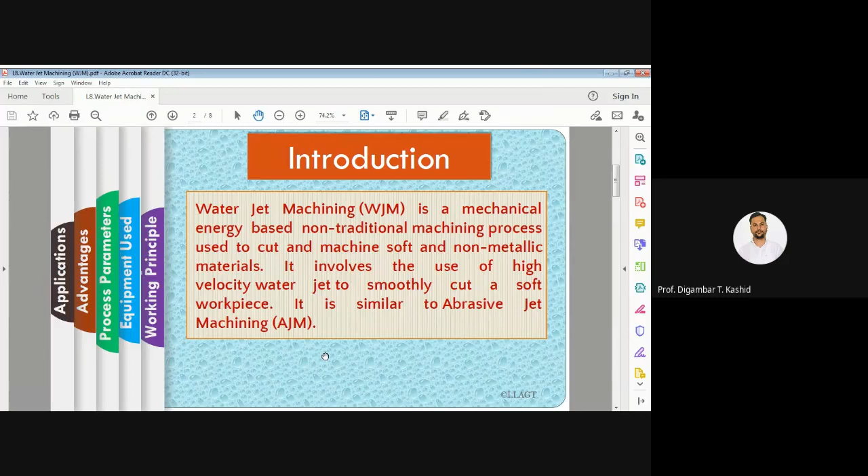In short, in water jet machining, high velocity water jet, up to 900 meter per second, is allowed to strike a given workpiece, and during this process its kinetic energy is converted to pressure energy, which induces a stress on the workpiece surface. When this induced stress is high enough, unwanted particles of the workpiece will remove automatically.

Whatever removal of material in this process is there, that removal is caused by the water jet only. So water jet is the cutting tool for this process, or in this water jet machine. Remember, the water jet acts as a cutting tool which removes the workpiece particles, and it will never become dull since the cutting action is performed by the water jet only.

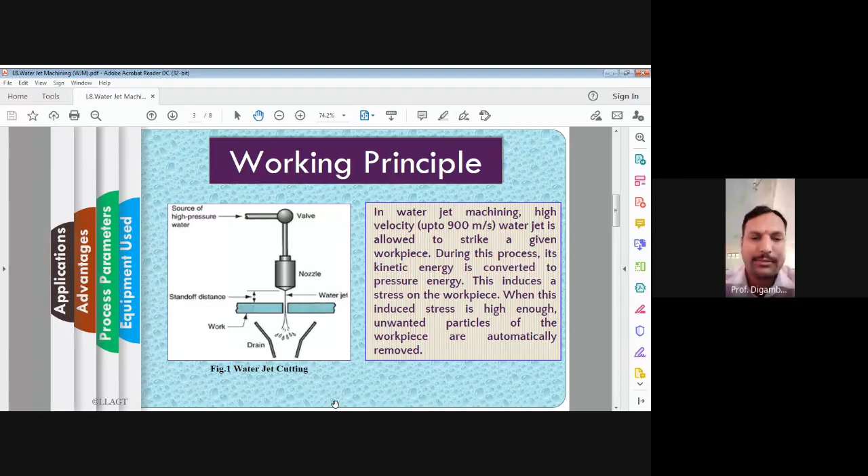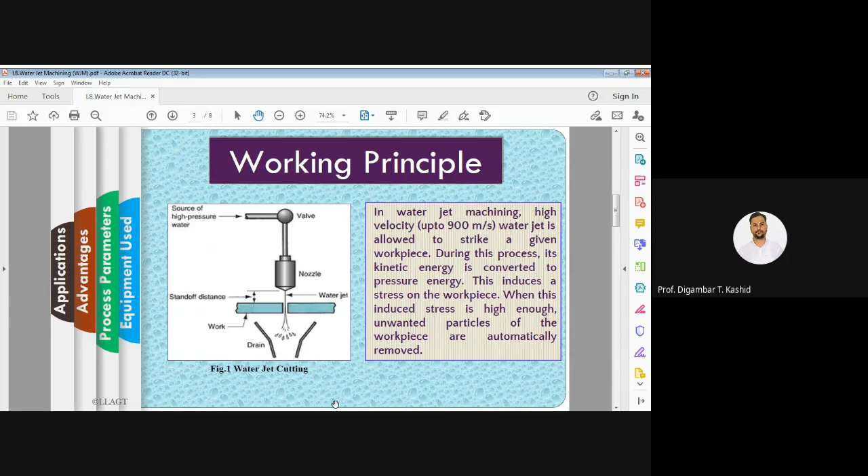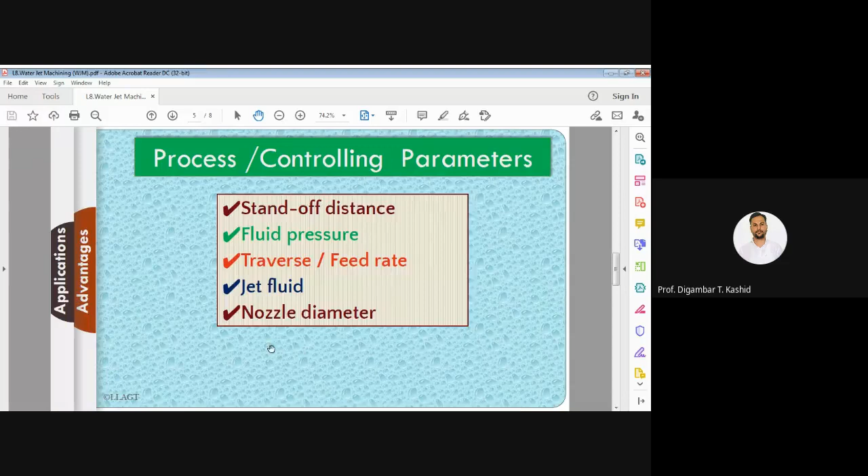Now let us discuss the advantages of water jet machining. The basic or general advantage I have given first: it is a fast process. Then it prevents the formation of heat affected zones on your workpiece, because here we are using water as the cutting tool. So there is no issue of the heat affected zone. It prevents the formation of the heat affected zone on your workpiece.

Again, as we are using water with high velocity, it automatically cleans the surface of your workpiece also. Again, it has excellent precision. What is the tolerance? Tolerances up to 0.005 mm can be obtained using this water jet machining process. And this process does not produce any hazardous gas.

Okay, again this process is very eco-friendly. So these are the advantages. Now, disadvantages also I have given. So here only soft materials can be machined. Okay, because if you want to cut the hard material using this water jet machine, then it takes more time.

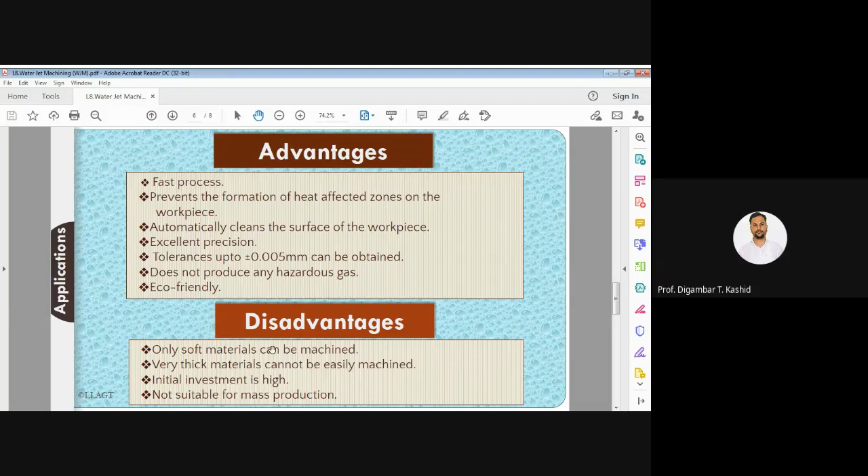Okay, again the initial investment is also very high. Okay, again for mass production purposes this process is not suitable. Okay, so these are the disadvantages. Now the last part is applications of this water jet machining. So here I have mentioned some applications.

So this process is useful for cutting materials which are porous, fibrous, then granular or soft also. Okay. Now, in some books they have not stated the fibrous materials. These applications I have taken from one of the textbooks. Okay. So this process is useful for cutting materials which are porous, then granular or soft. Okay, again it includes materials like corrugated boards, then rubber, granite, then plywood, glass, aluminum also.

Okay, again this process can be used to cut wood, ceramic, composites, leather, foam, wire stripping, and deburring purposes also. Okay, again in aerospace and other similar industries, cutting of asbestos is done by using this water jet, because there we need to minimize the airborne dust in the atmosphere. So if you use the water jet, then there is no issue of that airborne dust. Okay,

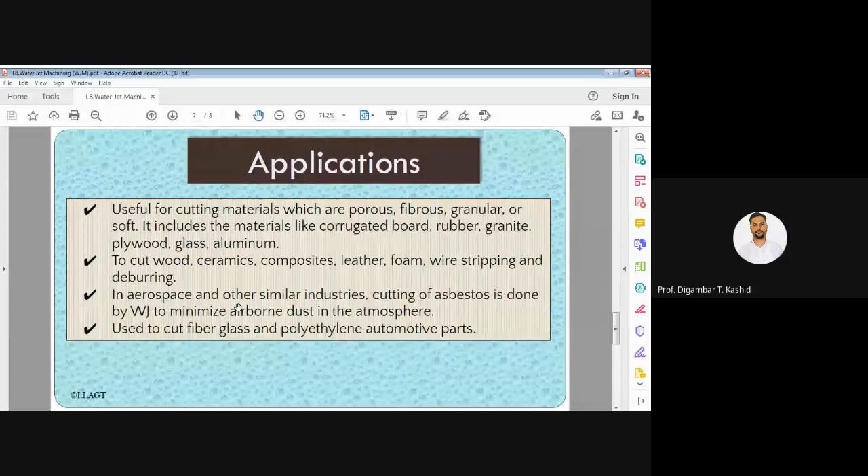Okay, we are not reusing the water. Okay, because if we take fresh water, there is no issue. But to reuse the water we need water treatment and other things. Okay, so it is better to take fresh water. Now one thing I forgot to mention here: in this diagram you can see when the water jet comes out of the nozzle, it travels at a very high speed, usually more than sound velocity, that is up to 900 meters per second.

And to minimize the exposed length of your jet, from a safety point of view, and to minimize the process noise, here a drainage, also called a catcher, is used, a slot type or tube type catcher. Normally that catcher is attached to your drainage hose. And what is the purpose of this catcher? The catcher uses a hard and replaceable insert to break the jet quickly and completely, before it reaches the bottom of your tube. So slot type or tube type catcher is used. So a catcher is required in this water jet machine also.

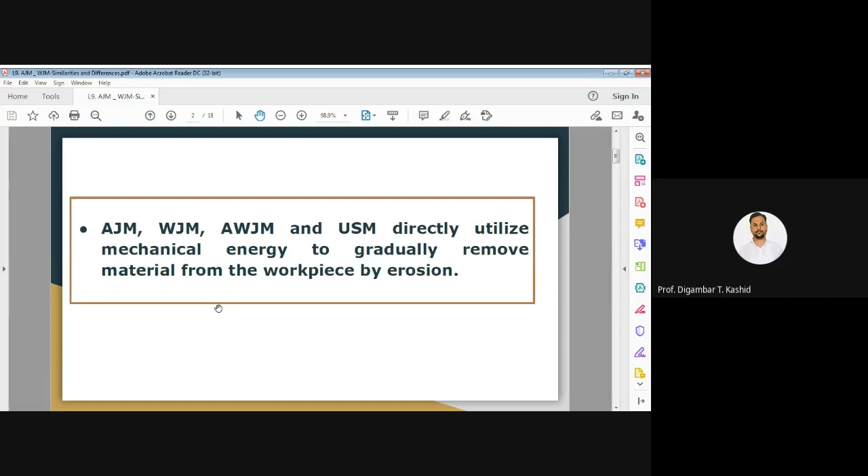Now in this slide I have shown the similarities and the differences between abrasive jet machining and water jet machining. As we know, both abrasive jet machining and water jet machining directly utilize mechanical energy. It may be in the form of kinetic energy or pressure energy, and that energy is utilized to remove the metal from your workpiece by erosion action.

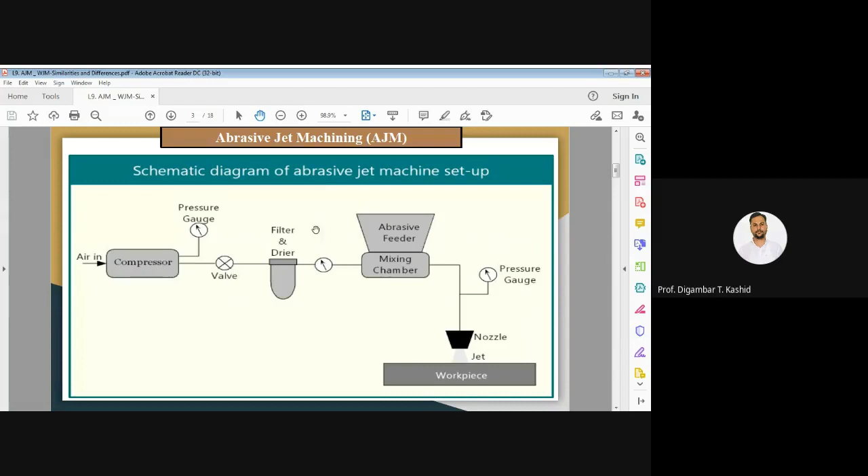We have studied the working principle of abrasive jet machining, and just now we have seen water jet machining also. Now let us discuss the similarities first. Both are non-traditional, non-conventional machining processes, none of them is considered a hybrid process, and both are mechanical energy based non-traditional machining processes because they directly utilize kinetic energy to remove the material.

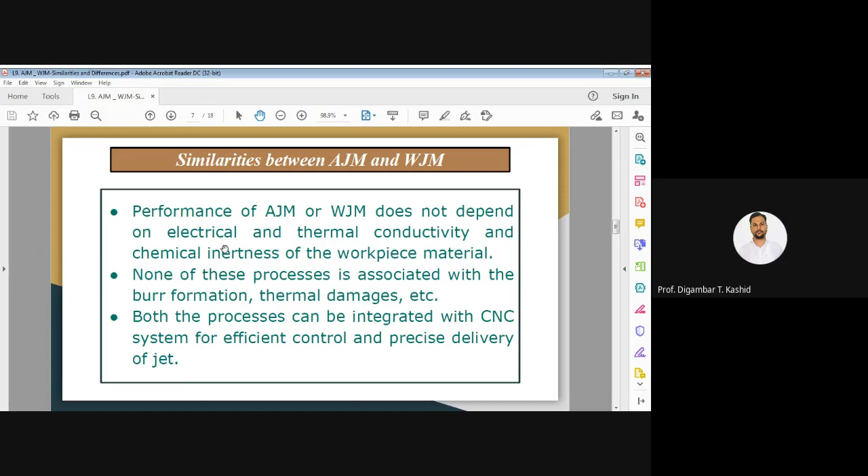Both processes require an appropriate nozzle for converting the pressure energy of the fluid into kinetic energy. The performance of abrasive jet machining or water jet machining does not depend on the electrical and thermal conductivity or the chemical inertness of the workpiece material. None of these processes is associated with burr formation, thermal damage, or a heat affected zone. Both processes can be integrated with a CNC system for efficient control and precise delivery of the jet. These are the general similarities.

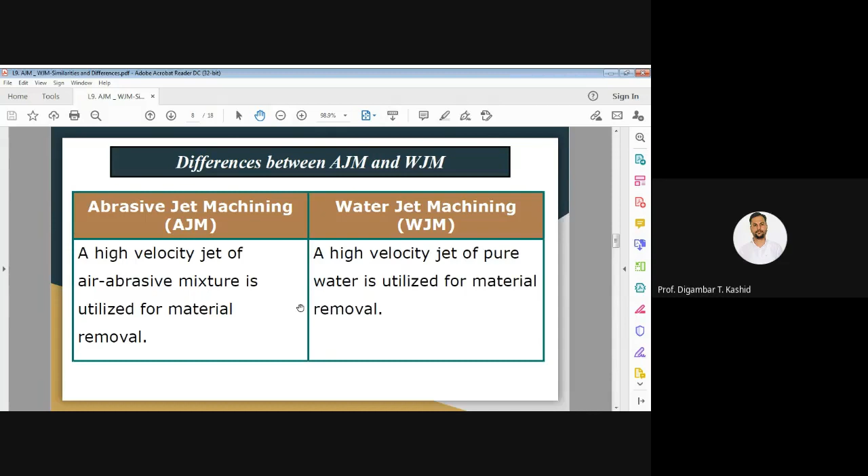Now the important part is the differences. I have made two columns: one with the points about abrasive jet machining and the second regarding water jet machining. In abrasive jet machining, a high velocity jet of air and abrasive mixture is utilized for material removal, while in water jet machining a high velocity jet of pure water is utilized. The working medium for abrasive jet machining is dust free and dehumidified air; in water jet machining the working medium is clean water.

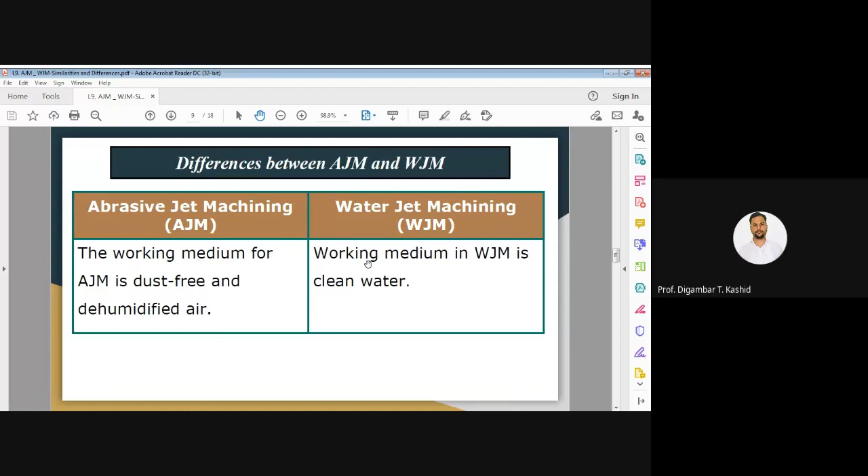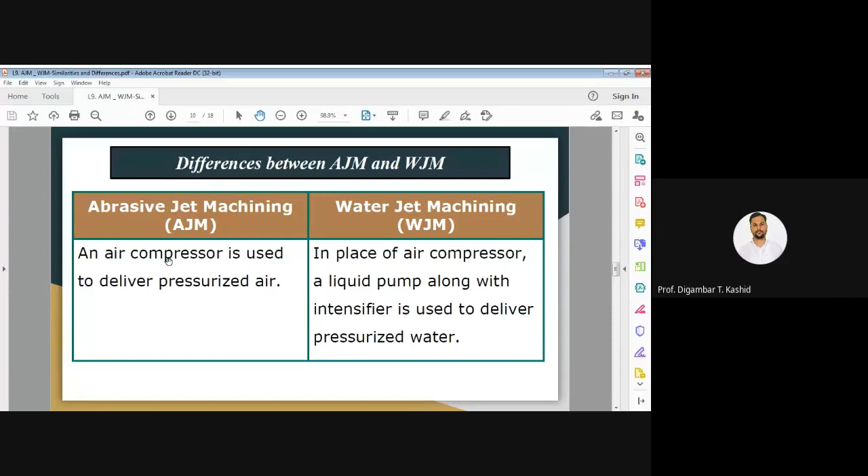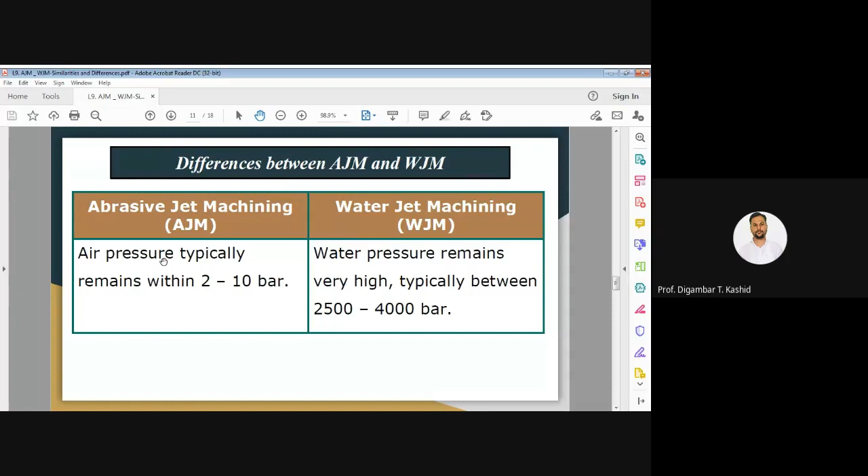For abrasive jet machining, an air compressor is used to deliver pressurized air. In water jet machining, in place of an air compressor, a liquid pump along with an intensifier is used to deliver pressurized water. In abrasive jet machining, the air pressure typically remains within 2 to 10 bar only, but in water jet machining the water pressure is very high, typically near about 2500 to 4000 bar.

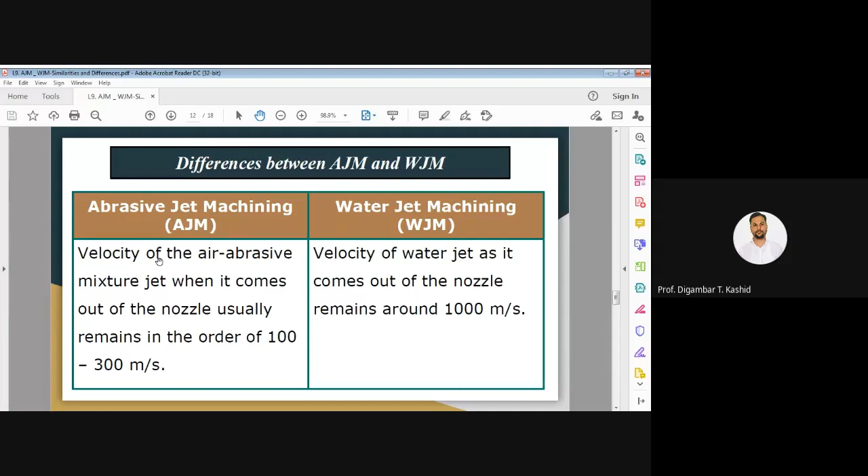Then the velocity of the jet. In abrasive jet machining, the velocity of the air abrasive mixture jet when it comes out of the nozzle is in the order of 100 to 300 meters per second. But in water jet machining the velocity of the water jet is very high; when it comes out of the nozzle it is around 1000 meters per second.

Again, in abrasive jet machining there always exists a tendency of grit embedment on your machined surface.

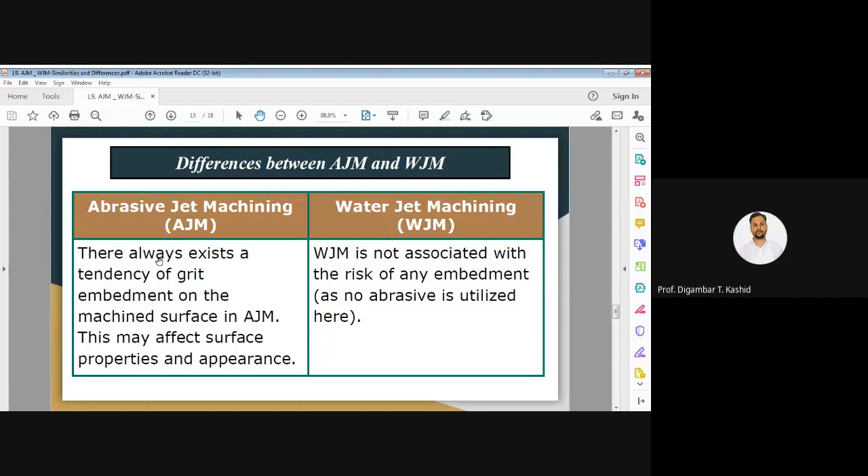This may affect the surface properties and the appearance of your cavity also. But water jet machining is not associated with any risk of embedment, as no abrasives are used. Abrasive jet machining cannot be employed in the food processing industry because of the risk of abrasive contamination. But water jet machining is preferred and hygienic for slicing food items like frozen meat and fish.

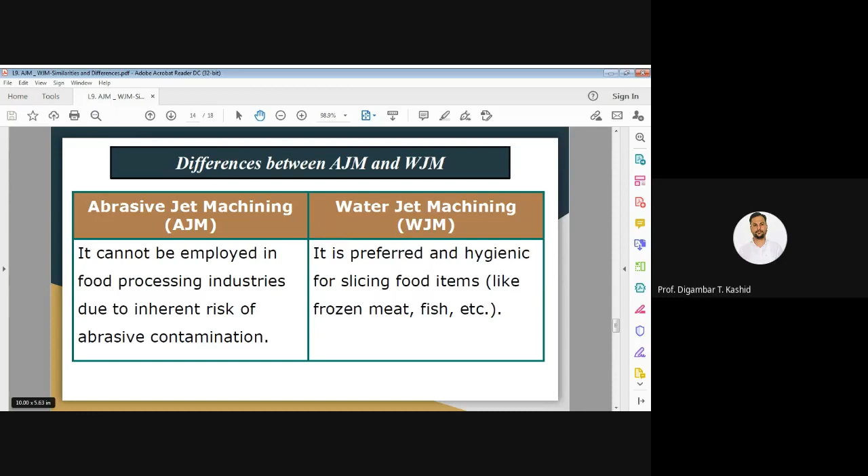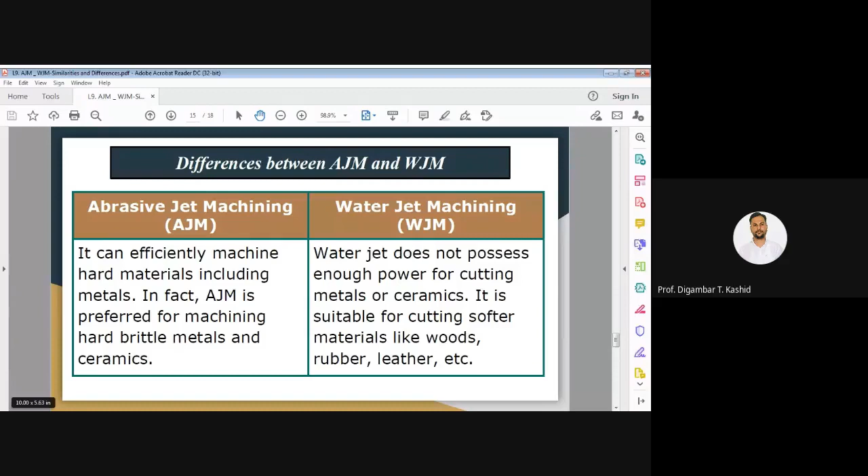Abrasive jet machining can efficiently machine hard metals; in fact, it is preferred for machining hard brittle metals and ceramics also. But in water jet machining, the water jet does not possess enough power for cutting metal or ceramic, so it is suitable for cutting softer materials like wood, rubber, leather or foams. So within one slide I have given the differences between water jet machining and abrasive jet machining.